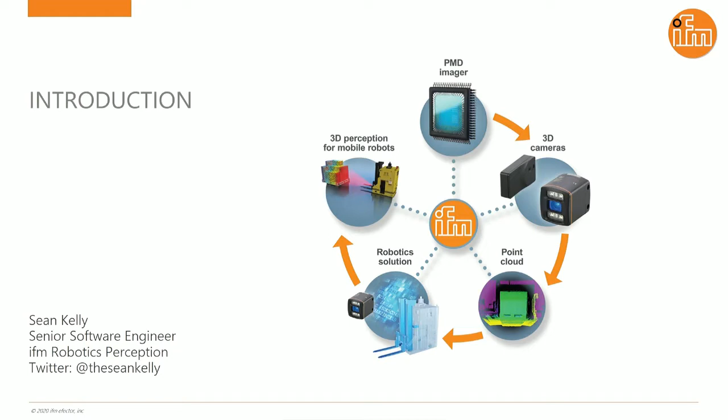So you've probably heard the term edge computing before in the context of cloud computing and IoT. The idea is that by offloading work from your central data center onto edge devices, whether they're cell phones or smart connected sensors, you can enhance the user experience of your application by reducing latency, increasing responsiveness, and it also reduces the workload on your data center itself.

Another way to think about this is a transition from a centralized computing model to a decentralized computing model. In a centralized world, there's a single entity referred to as a node, which is responsible for computing all of the work in the system. This is the basis of the mainframe model in the earliest days of computing. There'd be a single system which did all of the work.

In the mainframe model, the idea of a distributed node did exist through terminals. These were individual workstations that could remotely access and work with the mainframe. However, these nodes weren't really nodes. They were monitors, keyboards, and modems, and they simply facilitated remote access to the mainframe. All of the work was still happening on the mainframe. All the scheduling was there. None of the work was offloaded to the nodes.

In the 80s and beyond, as the compute capabilities of these nodes started to increase with the rise of personal computing, we started to see the client-server architecture. This is where you'd still have a central server that was responsible for orchestration and shared work, but it would also be able to dispatch work out to various nodes to accomplish individual tasks. This is really the first instance of modern edge computing at work, though it didn't have that name.

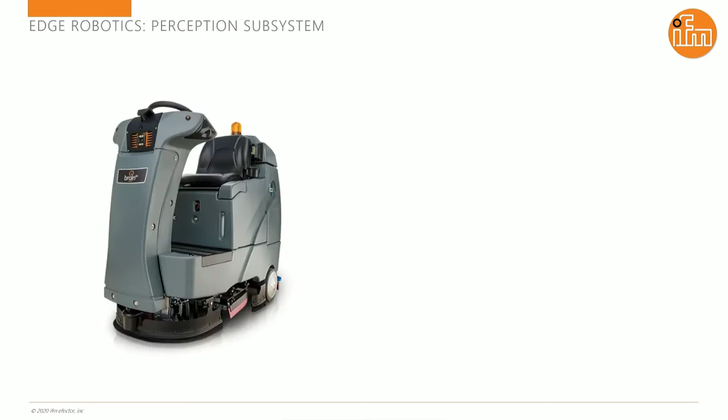Here's a typical robot. This is an autonomous floor scrubbing robot by one of our partners, Brain Corporation. And you can see it's got a lot of sensors on it. Processing this sensor data at the edge through a perception subsystem, which again is that idea of an edge gateway that's local on the vehicle, you can start to enhance the overall system design of your robot.

For one, it makes it easy to add specialized compute nodes into your compute graph. Things like GPUs are becoming increasingly popular for AI, machine learning, and computer vision workflows. Rather than upgrading your entire central controller to have some GPU resources, you can simply add an edge node that has a GPU on it.

Another topic is that these sensors often communicate over low-level, board-level interfaces like SPI, I2C, or MIPI CSI. Higher-level CPUs don't always expose these buses, and in a centralized model, you would need to convert that data to something like Ethernet or USB. That conversion is unnecessary, and it simply adds latency and extra compute time. Instead, by computing and processing this information at the edge, you can consume the data directly off the board level interface.

Sensor fusion is the whole idea of bringing multiple sensing modalities together to solve a common problem. Every type of sensor has its strengths and its weaknesses, and by fusing the data together, you can maximize the strengths and minimize the weaknesses. Doing this at the edge has advantages because all the data is in one place to begin with. It comes straight off the sensor onto the centralized or decentralized perception subsystem, and it's handled right there. You don't need to worry about shuttling it all around the different nodes of the device.

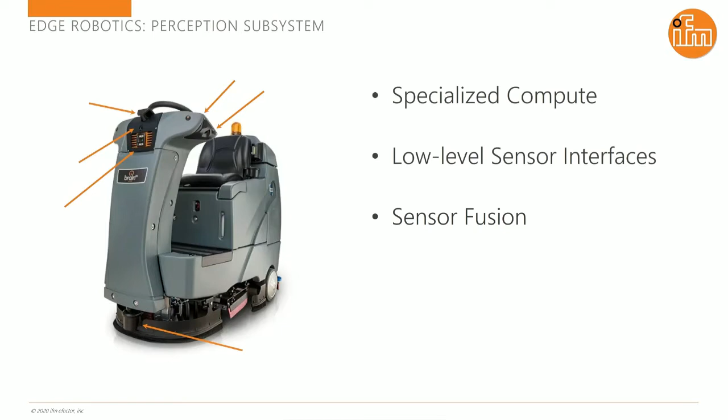Time synchronization. This is really a subpoint to sensor fusion, but the idea here is that these vehicles are in motion, and their sensors are not necessarily capturing their data at the exact moment. So it's important to be able to correlate time and figure out exactly where the robot was when a given sensor recorded its data. Again, doing this at the edge has advantages. It's often a lot easier to synchronize time in hardware. You have much more fine-grained control over how time is recorded through, say, GPIO timer snap registers or things like this. And again, having one dedicated system handling sensor input, you've got a single clock to worry about. You don't need to worry about synchronizing the tick counts between all your different sensors and how they relate to your central controller. It's all handled at the edge.

And finally, data reduction. By consuming all of the sensor data in one distributed node that's off-board, not the central processor, you reduce the workload on the central processor because the perception subsystem handles the task of fusing the data, merging it together, reducing it down to something actionable, and then it only needs to interface with the central controller when absolutely necessary and when it has actionable information to work with.

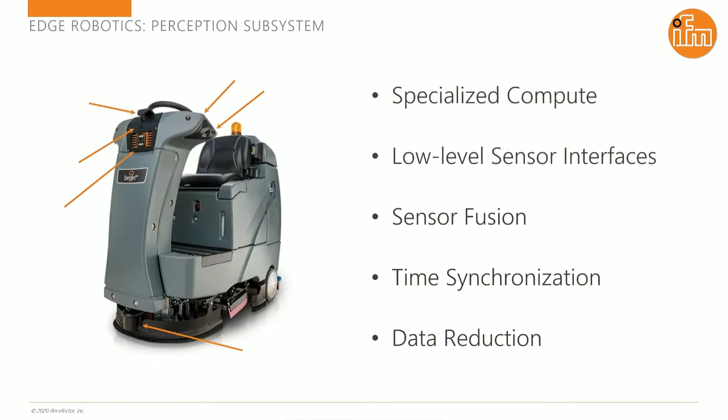So if you're on board with this idea and you're ready to get started developing your software and developing your robot with some of these edge ideas in mind, there's a lot of technology out there that'll help you start. This isn't going to be an exhaustive list, nor an in-depth tutorial, but just to give you some ideas of where to start.

The first is the idea of distributed computing. Distributed computing goes hand in hand with decentralized computing. The idea with distributed computing is to compartmentalize your software into individual modules that are as standalone as possible. And this promotes testing, it promotes iterations, iterability, like you can iterate faster. And it also promotes flexibility for system design. If you have your software system designed in a distributed way, it becomes very easy to move components around. Say you had a centralized system today and it was a distributed computing model. It'd be very easy to take one of those nodes and push them off to some edge device to do the work there.

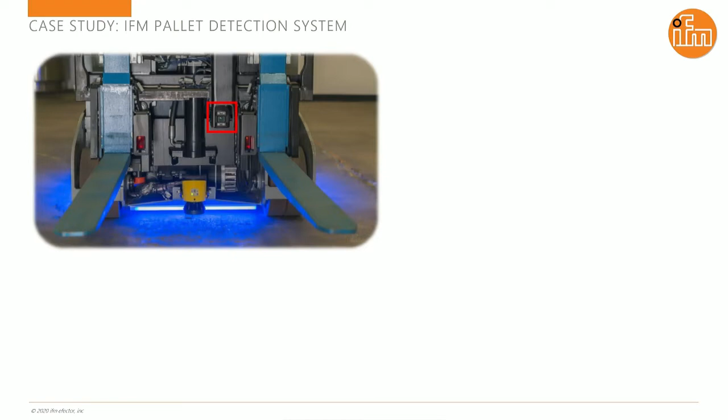The next example is the IFM pallet detection system. This is an algorithm that uses the O3D 303 camera to determine the position and orientation of pallets and racking systems with respect to an AGV.

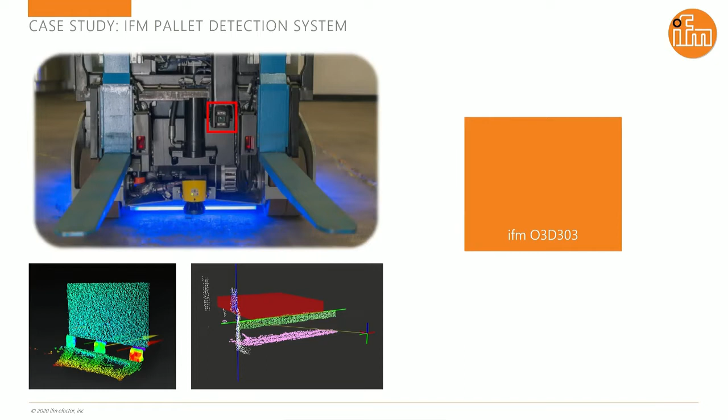The solution is implemented as an edge solution. We have the IFM O3D 303 camera, which is the actual device responsible for imaging the scene, and it has compute capabilities on it. The pallet detection system algorithm itself runs embedded on the device and simply communicates to the outside world through a lightweight TCP/IP protocol or a CAN bus protocol, if that's what the vehicle happens to use.

This is exactly what we're talking about with edge compute. Instead of outputting the 500 kilobyte point cloud to a host controller and asking it to crunch the data, we're producing actionable outputs.

We're only transmitting the information that the vehicle needs to do its job. There's a secondary benefit that I haven't quite touched on, but it becomes apparent when you're considering third-party solutions like this, and that is the simple integration. As an AGV manufacturer consuming a third-party component, it's a much more attractive scenario to simply have to mount a camera, apply power, and implement a wire protocol, as opposed to installing and maintaining IFM software on your host controller.

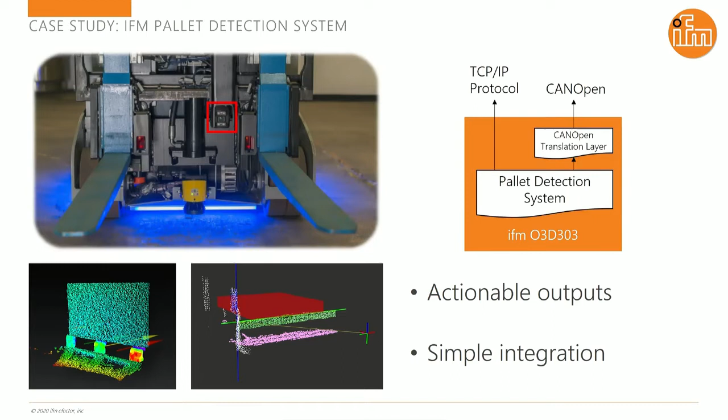You don't need to worry about the workload that PDS adds to the system. You don't need to worry about the cycle times. You don't need to worry about the resources that it consumes. It's all self-contained on that device.

Now we'll have a short hands-on demonstration showing how you can use edge computing concepts to enhance vision workloads. For this demo, I'm going to use the IFM O3D 303 time-of-flight camera.

It uses IR light to illuminate a scene and measure the depth information, and it transmits that information over a TCP/IP protocol. We'll look at two separate programs, and I'm going to run them locally on my laptop, which has an Intel i7 processor. I want you to think about that laptop as if it were the central controller on a robot.

We'll also take a look at running the same two examples embedded on the O3D303 as an edge solution, and we'll talk about some of the advantages in doing so.

The two programs I'm going to show you are written for ROS, which again is just a great system for distributed computing, especially for robotic applications. And if you want to learn the details about that, you can visit ros.org. And finally, all the source code that I'll be using is here on my GitHub.

All right, so this won't be an exhaustive ROS tutorial, but there's a couple concepts that you need to know. The first is that of a node. For the purposes of this demo, simply think of a node as a program. It's an executable, it has an entry point via a main function, and it does a task.

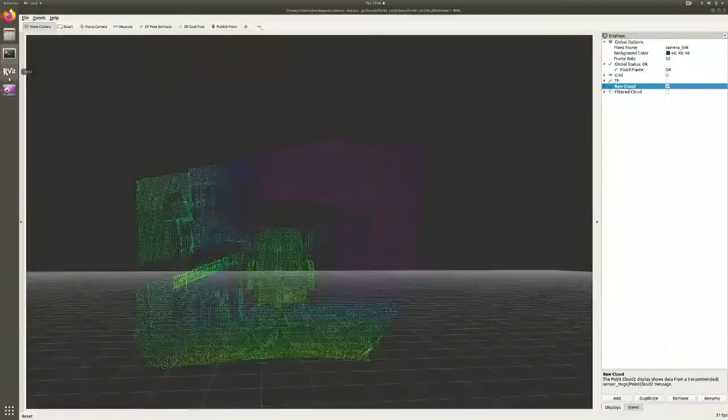And so this is what a point cloud looks like. This is raw data coming off the sensor. Each dot that's colored here represents a point in space that the camera measured. So you can see you can get pretty rich, dense information.

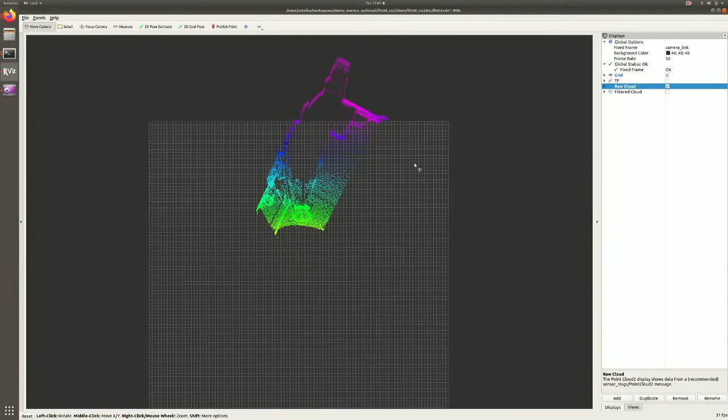Let's say we wanted to reason about this chair in front of us. Couple things I would start with off the bat. The first is the idea that there's all this, this is a top-down view now. All this information up here is way in the background of my room. And let's say I know that my chair is going to be in the near field. I don't want to waste cycles processing all that information, so I want to drop information that's beyond a certain point.

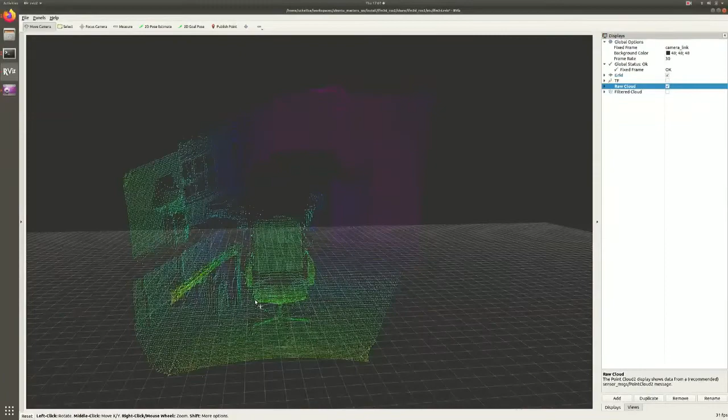The other thing is that it's kind of a noisy signal. If you look at it straight on here, there's this line right here, it's flying off the edge of the chair. There's a lot of strange dots floating in space, and this is pretty typical for a lot of different 3D sensing technologies. So pre-processing and filtering is almost essential for these sorts of applications.

Let's have a look at that. So the code here, it's another node. It's going to look almost identical to what we just looked at, so I'll point out the key differences. We're again creating a publisher, except this time we're calling it filtered cloud, and the type is a point cloud 2. So instead of outputting a single floating point value, we're outputting an entire filtered point cloud.

This is the same subscription we looked at on the last example. And in the body of the callback, we're again converting to a point cloud, a PCL message, outputting some information about it. And then here's our filtering.

So the first step is I'm going to use a point cloud filter from the PCL library to chop out anything beyond 3 meters in X. The next thing I'll do is I'll use a statistical method called statistical outlier removal, which looks at individual pixels and their nearest neighbors to determine whether or not they're outliers. So I'll apply this filter to our cloud now, and the output is cloud filtered right here.

And then finally, I'm going to convert that back to a ROS message and publish it on the topic we created.

So again, if we go over here and look at our topics, here is the topic we created, filtered cloud, and the type is point cloud 2. And that's in fact what is being rendered in RViz if we go over here.

So again, this is the raw cloud. There's all that stuff in the background. There's the flying pixels on all the edges. If we switch over to a filtered cloud, now this is a lot nicer. We can start to reason about this information a lot better.

That's not really a great use of resources, but it's necessary. This is a great candidate to do on the edge because it's the sort of thing that's going to happen exactly the same on every single frame before we can do any work. So by pushing that sort of task off to the camera...

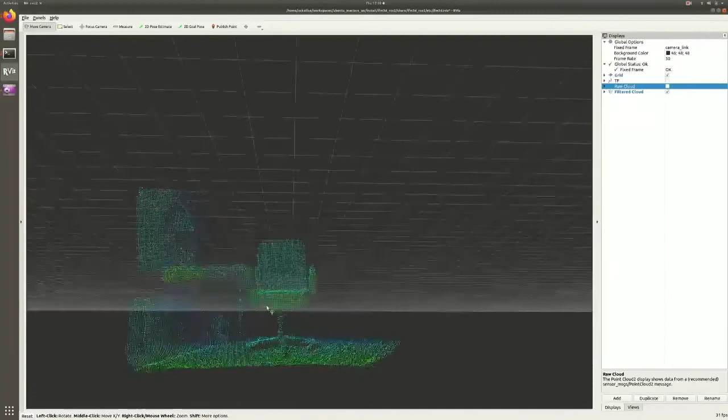So again, I'm going to run the same node cross-compiled and deployed to the camera. And we can go look at our visualizer and see that indeed we're getting data out of the camera. So it's the exact same thing happening, except we're not utilizing very many resources at all to do it. In fact, there's no process running on the host controller. There's no drivers, there's nothing. We're just getting the data over the topic.

So those are a couple examples of hands-on how we can use the idea of edge processing to enhance some workloads that we find in computer vision. Edge computing is a term common to cloud and IoT, but its ideas are increasingly being applied to robotics. It helps enhance system architecture by managing workloads and introducing specialized compute devices. It improves perception pipelines through data reduction, pre-processing, and sensor fusion. And it increases overall agility by promoting modular designs with easy integrations.